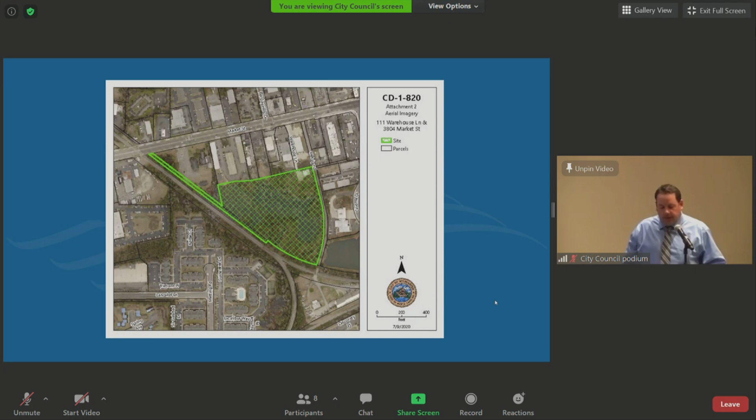Thank you, good evening Council. This item was continued from last week to allow time for the applicant and the adjacent owners to come to terms on the improvements being proposed. Just a quick recap: this site is located on the west side of Wetsig Road, south of Market Street, east of Cinema Drive. It's approximately 10.5 acres in size. The applicant proposes to rezone the property from CS Commercial Services to MFMH for a 192 unit residential development.

This proposal includes the improvement and dedication of Wetsig Road from the property boundary to Market Street, and the applicant is also proposing a right-of-way connection to Cinema Drive. This is the site plan that you saw last week.

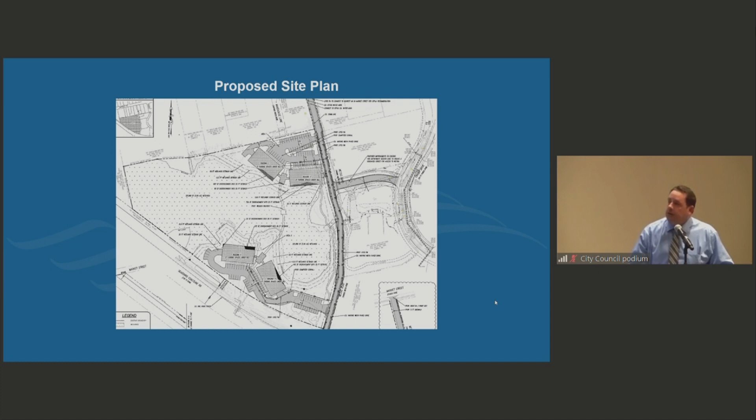Since that time, the applicant has modified their preliminary plan and moved that right-of-way down 30 feet away from the adjacent property owner. I have been in touch with the chair of the SRB, and they would consider that a minor modification, so it would not need to go back to the subdivision review board for this change.

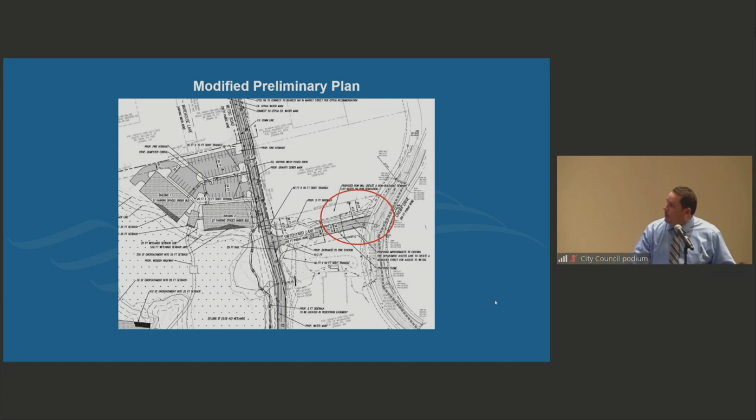I also want to go over, last time we had representatives here from the Cinema Drive Office Park. This is their approved plan, and their concern is future building and whether they'd be able to build it as proposed. We've spoken with staff in zoning and the city attorney's office, and we believe this site plan is vested, so they would be able to build this regardless of whether Wetsig becomes a public dedicated right-of-way or not.

There's also a provision of our code that says a public right-of-way conveyance impacts setbacks. So long as they meet 75% of that requirement, they would not be considered non-conforming. So based on the movement of the right-of-way and those provisions of the code, there's minimal impact on this property and its future development.

Staff really don't have any other further comments at this time or any updates. We do recommend a conditional approval. The applicant is here with a presentation as well, and I'd be happy to answer any questions you might have.

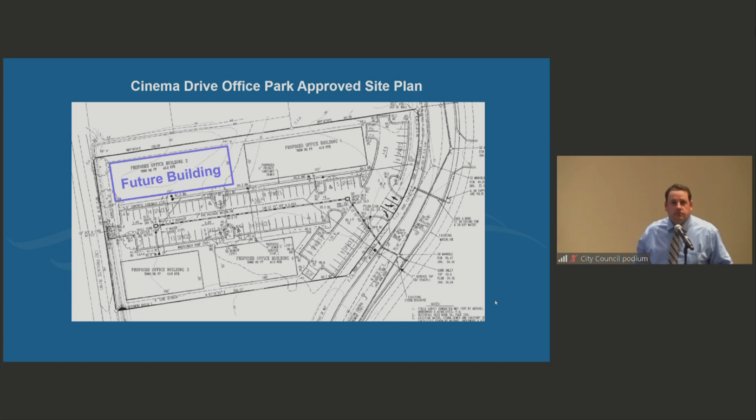Right now there's nothing specific in the ordinance for a condition on parking. Right now they would be held to the minimum requirements, although the land development code for parking does allow them to apply for an alternative parking plan that's reviewed and approved by the technical review committee. So that would have to be submitted to the review committee to get a reduced parking amount, but there's nothing specific in the ordinance that addresses that right now.

I thought the problem was the neighbors were concerned that they didn't have enough parking and that people would be parking on the roads. Correct. So that's still an open issue. The applicant has not changed the proposed number of parking spaces at this time.

Council member, I will note that if you look at condition 5 in the proposed ordinance, that has been updated and it would actually allow up to 80 additional parking spaces. That's not on the plan in front of you, but it is some flexibility that we have built in if council is so minded, so that the 80 parking spaces could be allowed.

And we even put in an ability for them, if you'll excuse the term, to wiggle the buildings just a little bit in order to accommodate that. If they were so minded, it wouldn't have to come back to council. What did you say about the building? Justin, go ahead, John, explain again please.

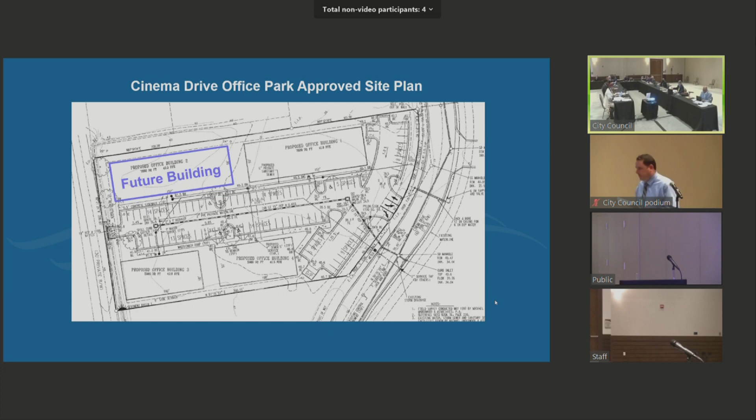Good evening. My name is Dave Spitrino, and I'll just give a quick recap. Since our last meeting, what I understood to be were the three main issues regarding our proposal. One was the alignment of the connector road that we're proposing.

If you can go to slide 2 on the screen. This is what we initially had, and I'll take the blame for this. I just was not picking up on the neighbor. It was the rear of their building, and I had the right of way going to the rear of their building. I didn't see a concern with that.

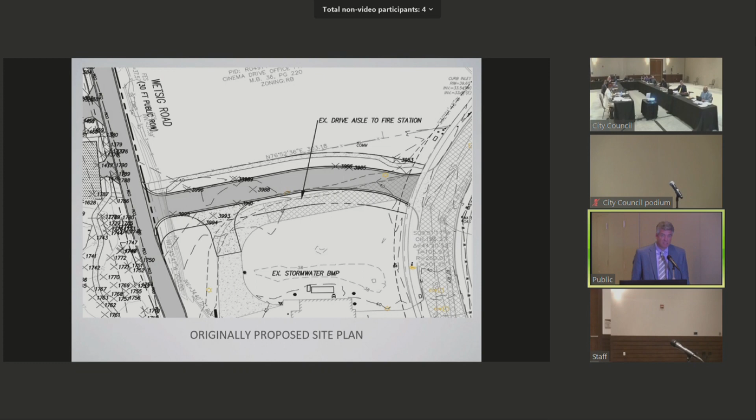When it was brought to my attention, we went to slide 2, next slide please. We've pulled that road over the top of the existing road where it is now, and that leaves us about 48 feet between the property line and the road. It seemed to be that that was the main concern, and as was reiterated to me, the concern of noise, but also proximity to their structures and also setbacks. So as being the main issue, we believe we've resolved that issue.

And again, I apologize. I didn't really ask the question as to why the road was in that place initially. I thought it was a technical reason, and I like it better here as well. So this worked out, I think, as a win for everybody.

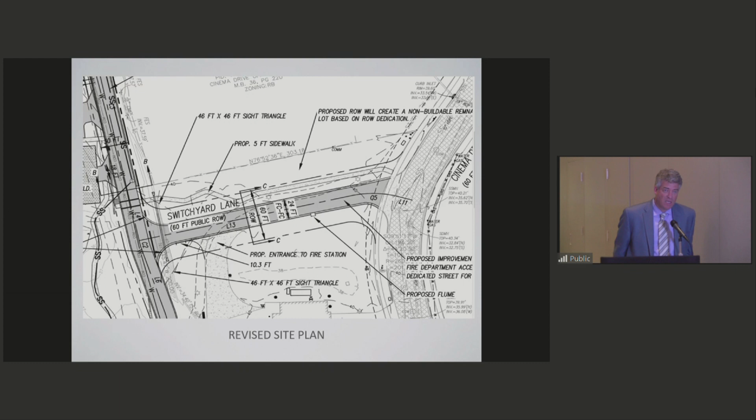The second, and Councilman O'Grady brought it up, we do not want to underpark our project. That is not our intent, but I'm more afraid of overparking than underparking. I can always pretty easily add more parking spaces. As mentioned, we have acres and acres of land that will not be developed. But if I need additional parking, I would much rather capture that additional parking when appropriate versus tearing out trees only to have parking spaces with no car there.

We are completely fine having a range of parking. Again, I'm going to be aggressive in trying not to overpark the site, but at the same time, we will create places and locations so that in the event we need additional parking, or if staff thinks we need additional parking -- our interest is in trying to preserve what's existing. There is no interest in clear cutting a site like this just to satisfy an arbitrary parking rule that doesn't necessarily apply to the type of users or residents in our homes.

And then last, and I was glad to see this was resolved, was the potential for a non-conforming setback along Wetsig Road once it becomes public. I didn't see this either, it just didn't dawn on me. Wetsig has been there physically for many, many years, decades at this point.

And to think that we were even approaching the potential of a taking of our neighbor's property, it's not something I would be comfortable with, and I certainly wouldn't ask my neighbor to be comfortable with that. So I appreciate the work of both staff and our city attorney in reassuring all parties that they're not getting a street frontage at somebody else's expense on a city street for potential future redevelopment at my cost, not theirs. But in the event that they want to do something differently or build to their existing setbacks, they're protected to do so. This is something we worked on diligently after our last council meeting, up through the weekend, and I'm glad to answer any questions.

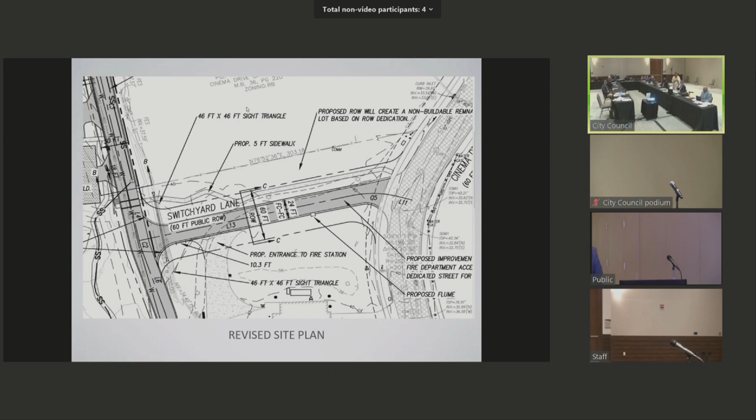Since we left the public hearing open, I guess this time I'd like to welcome anybody that wants to speak for or against this project to come forward.

Thank you, and good evening, Mr. Mayor and members of council. My name is Matt Nichols, and as you may recall, I represent the Cinema Drive Office Park Association. The relocation of Switchyard Lane, we appreciate that. That is a good thing. I think it's now shown as 47.5 feet from my client's property line to the proposed edge of pavement, and that is a good thing. We appreciate that. I do appreciate the city attorney's office and discussions on the vested rights issue, as Mr. Chambers mentioned. So I think we've clarified that issue.

My client's engineer, Dan Dawson, is here and had a few points he would like to make. I'm not an engineer, so if it's acceptable to council, I was going to have Mr. Dawson make those points related to some of the engineering considerations for the council's review. Thank you.

Good evening, council. I'm Dan Dawson, professional engineer. Just to make sure I got this straight, we were thinking Mr. Nichols would not be able to be here tonight. During the day, several of the HOA members who are engineers and surveyors went over and over what they want to make sure is covered. So that's what this plan presentation is about.

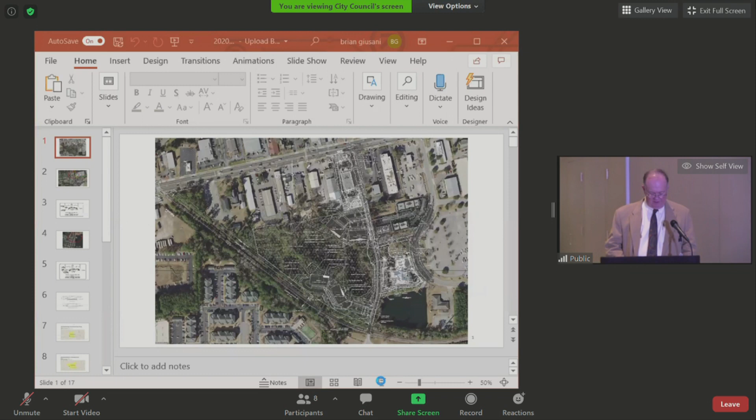Okay, we're now ready to go to slide 2. We have 3 main areas of concern that remain: infrastructure deficiencies, traffic problems, and land use changes.

All public streets should be constructed in accordance with city standards, with 60-foot right-of-ways and 25 feet from face of curb to face of curb. A standard public street should be constructed from Cinema Drive to the CSX Railroad right-of-way.

The HOA is concerned that converting Wetsig driveway to a public street, as proposed by the applicant, will burden the taxpayers with having to maintain a less-than-standard street, and later the cost to rebuild and widen it.

Based on information submitted, the applicant is proposing to widen the existing 18-foot driveway 1 foot on each side and add a ribbon of concrete or border, a 1-foot border along the edges.

The HOA is concerned that the street may end up being broomed off, with some asphalt and concrete added along the edges, becoming a burden to city taxpayers because the city council granted the waiver. Instead of the waiver, the HOA would prefer the city council encourage city staff and TRC to work with the applicant to provide an adequate and cost-effective street cross-section and pavement structure.

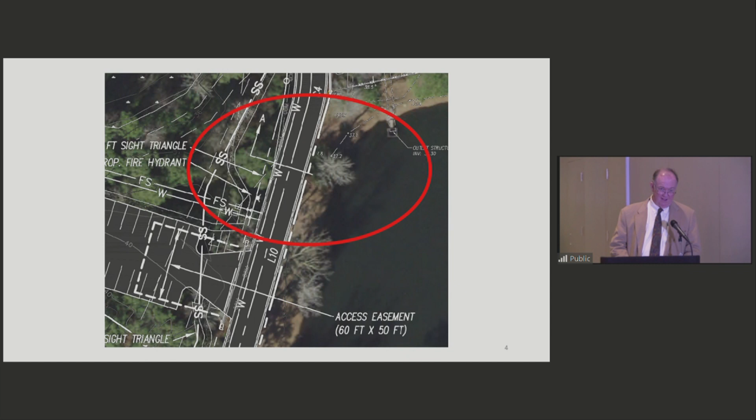Next slide. Oh, we're getting there. Next slide. Other way. The other next slide. What's going on?

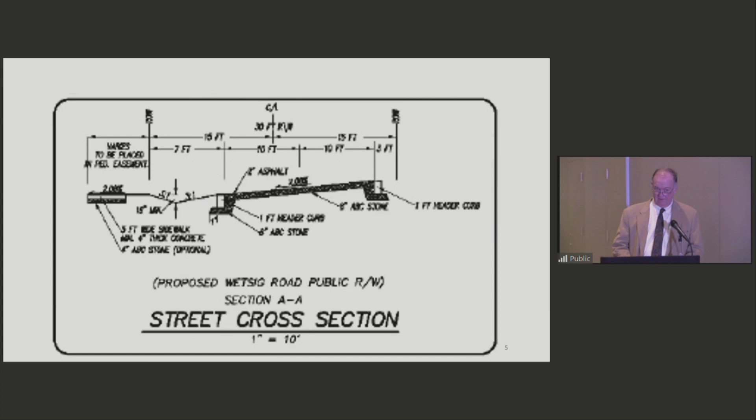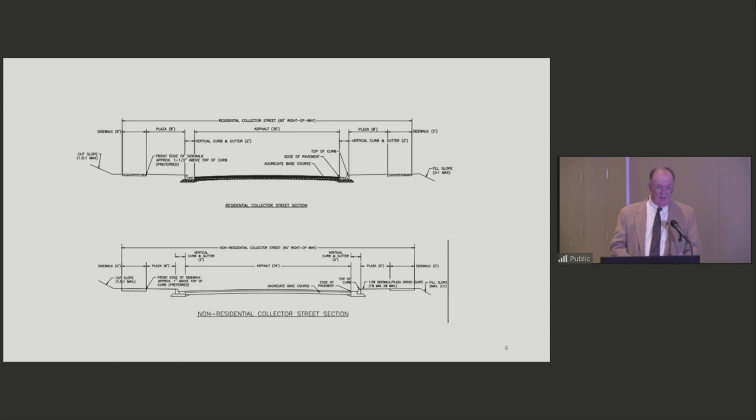We're worried about an inadequate stormwater network.

It's unfortunate for the applicant in that we call these infill projects, but quite frankly they're remainder projects—land remaining because nobody can figure out how to develop them. I respect him and his capabilities and wish him well as he pursues it, but he's got some challenges. Stormwater is one of them.

A member of the HOA observed stormwater flooding across the top of Wetsig Drive in the past. The existing culvert under Wetsig Drive lacks the hydraulic capacity needed to convey the upstream runoff, and the outfall for stormwater draining from the applicant's property is restricted—not only underneath Wetsig, but also when it attempts to leave the site across the railroad, it is restricted there also.

Fortunately for the city, the fire station was constructed 3 feet above the Wetsig road elevation. And I think that was for a reason.

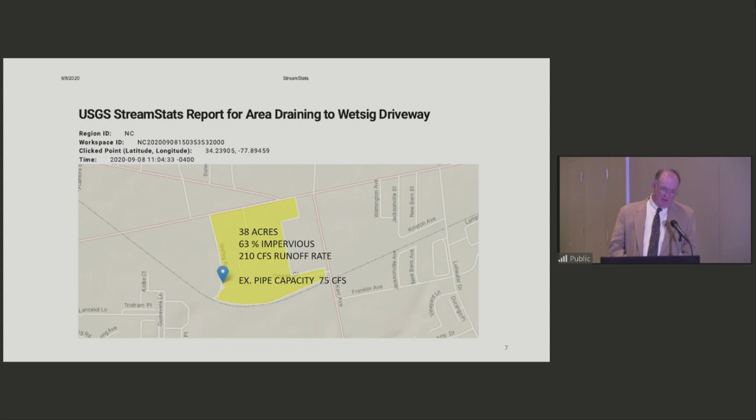Next slide. What basically you're seeing are the watersheds. The first one was the watershed to Wetsig Drive. The next one is the watershed down to the railroad track. There are large parcels of land.

The recent DOT widening of Market and Kerr Avenue altered that a little bit. We've met with DOT, or talked with DOT, about that. They've shared their limits, so it's a big watershed. I think if you look there, you'll also see that the current pipe underneath Wetsig and the current pipes underneath CSX are woefully inadequate to carry this water downstream.

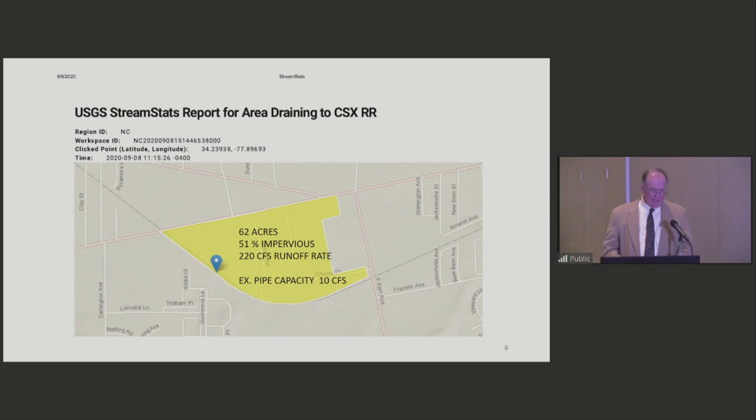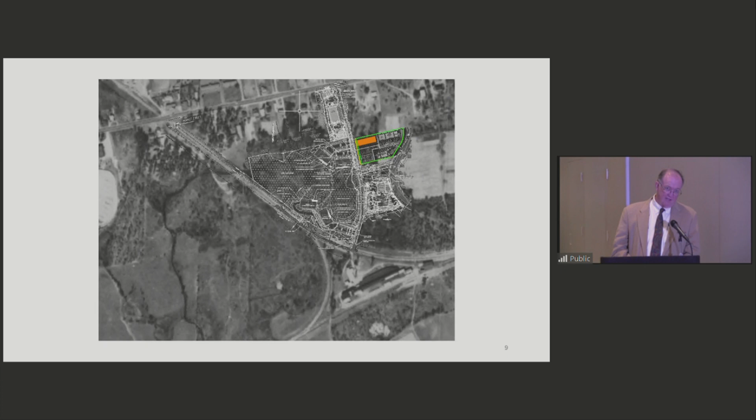Next slide. It's not there anymore. I'm not sure how the water will get out of this. It's very important, because when you take all that runoff from the upstream area and apply it to this site, the only place it's got to go is up, because there's virtually no outflow. I think that's why the road has been overtopped before.

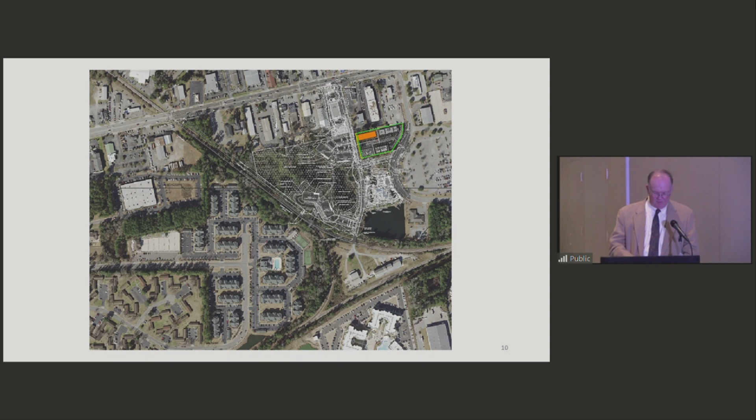So again, back to—we have concerns. We want it to work, but at the same time we really want the council and the staff to look at these things carefully so we don't have long-term problems. Next slide.

Okay, traffic problems. I told you there were three: infrastructure deficiencies, traffic problems, and land use changes.

On traffic problems: continuing to connect Wetzig to Market will create, and creates, a traffic cut-through that we do not desire to have. As proposed, a traffic cut-through will be created from Market Street to Carr Avenue via Wetzig and the new connector road, which will allow drivers to avoid 3 stoplights.

The Wetzig driveway from Mintz Plumbing to the right-of-way of Market should be closed and used by O'Reilly's, Mintz Plumbing, and Kyoto, formerly the Wendy's restaurant.

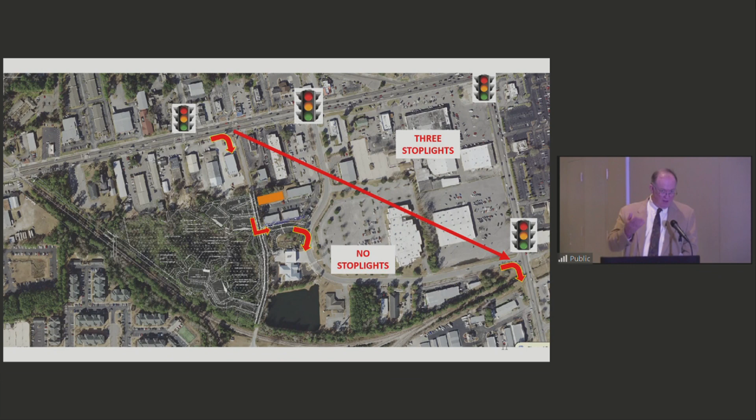We heard that once we started having questions, instead of dealing with issues, we were presented more challenges. A new challenge received on Friday was that the fire chief wants this connector road to Market Street to remain open. Even though it's 20 feet wide, I wouldn't put a $300,000 firefighting apparatus on it and risk it being damaged, but they wanted to keep that open.

This illustration shows there are 4 properties that would benefit from this drive remaining open. The alternative for fire response is to go to the new center via Market Street traffic, as they likely do half the time, and the other half they go down Carr Avenue, make a left, go down a half block to Barclay, make a U-turn, and they're in front of the 4 parcels.

So whereas we totally respect the fire department and know their response time is great, we disagree at this point about the true need to keep this 20-foot wide driveway open for the fire department.

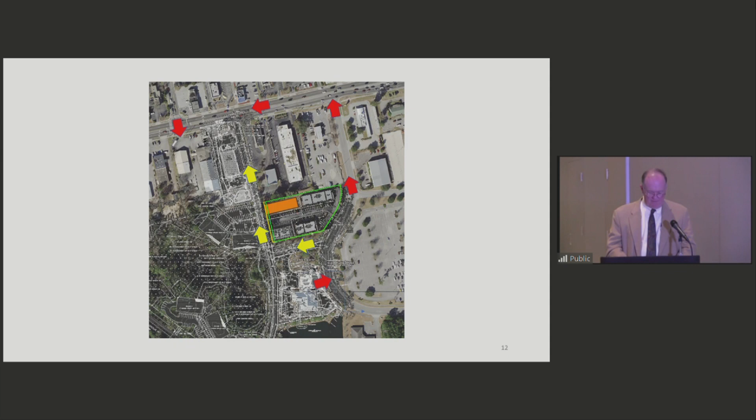Next slide. The immediate and future access to Fertile Ground - Fertile Ground, which is not the applicant, owns the 30-foot driveway strip from Market to the 3 acres of industrial property bounded by CSX tracks.

The property bounded by the tracks has probably been identified as a future hub for the proposed light rail system. As a hub, uses that could be foreseen in the future are park and ride, park and get on the transit, offices, more apartments, restaurants, etc. - definitely uses that are going to need more than a 20-foot wide driveway called a city street.

All of these future uses of this property will require more than a 22-foot wide and 30-foot wide right-of-way street. The existing traffic to the industrial property needs a standard city street.

To avoid the city having to purchase or condemn sufficient land for the remaining needed right-of-way, and then construct a proper road in the future, the HOA feels a standard public street should be constructed from Cinema Drive to the CSX Railroad right-of-way, as shown here.

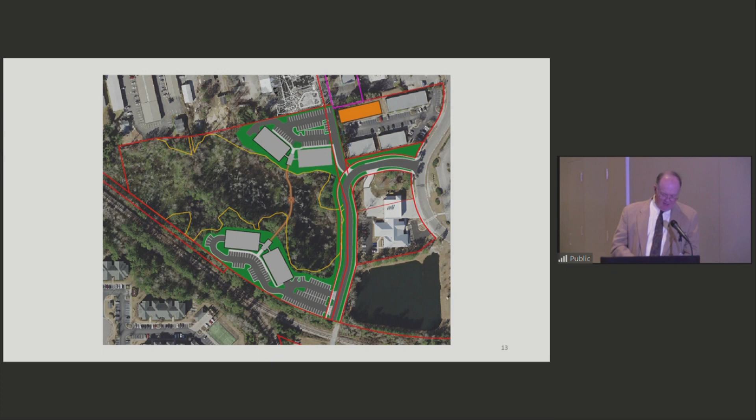Next slide. I'm about to finish. Land use changes - changes in the HOA rear setback requirements.

One of the owners asked me to add one more thing, and I apologize, I didn't have it in the notes. Back on the street right-of-way improvements and so forth, we realize the city decided this project did not need a traffic impact analysis. We don't know why, and we've been told certain things, but had it had the benefit of a traffic impact analysis, based on the experience of the parties, there would have been at least some determination as to whether additional length should be added to the left turn lane where Cinema Drive intersects Market Street.

In other words, when you bring all this additional traffic, and some of them are going to turn left, if you don't make that left turn lane long enough, you're going to have people backing into the through lane or the right turn lane. So we think, even though you didn't do a traffic impact analysis, that is something to be considered.

So on the changes to the setback, I think we've pretty much talked about that, but this setback issue is not just a zoning issue - it's also a distance from building to building. The current setback is 15 feet. The ordinance requires a front yard of 25 feet on the neighbor's property. The existing building is constructed 15 feet from the rear property line.

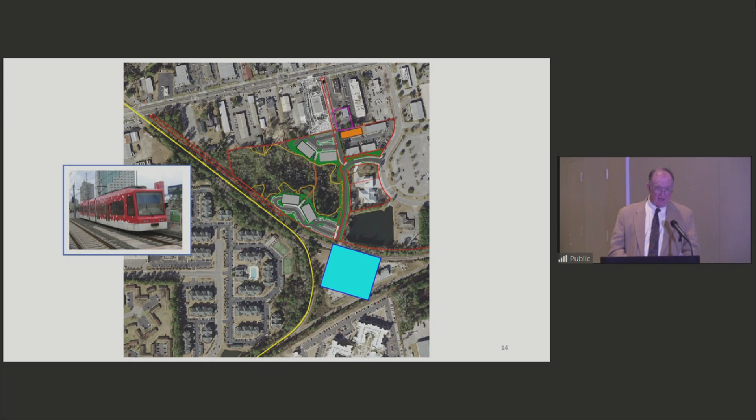The attorney's already covered most of that, and I'm glad he was able to cover that. So I'm going to move on to the last slide now, slide number 15. We're going to examine this area between the rear of the existing building, within that red oval.

You see the two setback lines. The yellow is the current setback line, the green is the proposed setback line if that's a dedicated street right-of-way. The point here is the distance between - you'll see on the left side there's building number 2, a 55-foot high building proposed to have parking on the bottom and 4 stories above it. They'll have to start about 3 feet above the road elevation just to keep from getting wet. But nevertheless, that building horizontally in plan view is where it's located. My client's office, or one of his buildings, is across the street.

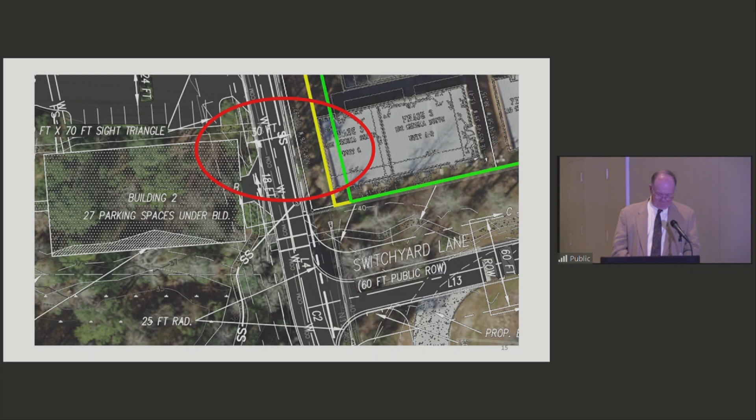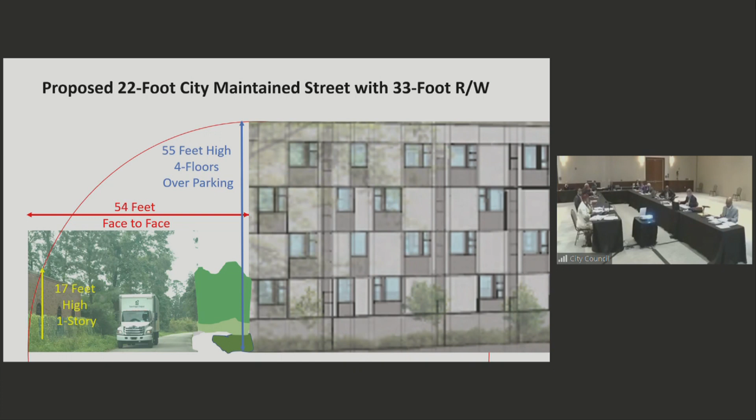Yes, sir, Mr. Anderson has a question here. Mr. Dawson, I'm curious - when that was zoned there, the office park, do you have enough parking to do the fourth building? Is that an abundance of good parking?

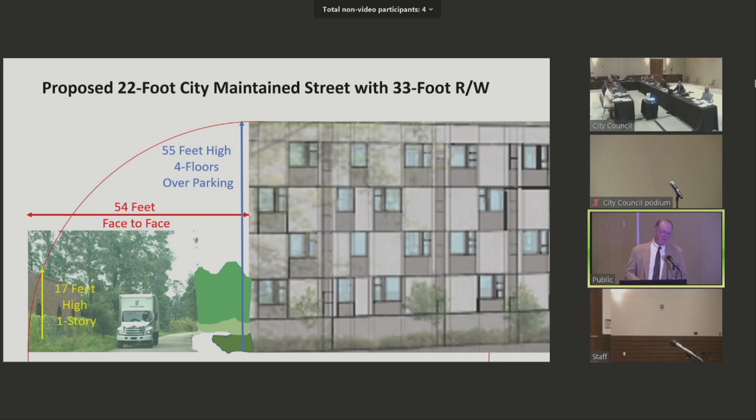Yes, sir. In fact, I believe the applicant, or maybe the staff, had a good photograph of the site - that's a good point. Another good point is the applicant's connector road is one lane in, one lane out. The HOA's property has 3 lanes: an entrance lane, a left turn lane, and a right turn lane. We strongly encourage that on that connector road, given the potential for future traffic, that the city consider requiring a left and right turn lane so traffic doesn't get backed up when Cinema Drive is busy and someone's trying to make a left turn.

Okay, yes sir, Mr. Spears. My question is for staff about these 9 waivers - I'm interested in that. The 9 waivers that Mr. Dawson told us about.

Yes, sir, Mr. Spears. The waivers for this from the city's technical standards were applied for and granted by the subdivision review board. Anytime you have an improvement in a public right-of-way or a proposed public right-of-way, it's required to be reviewed and approved by our subdivision review board. So it's my understanding, and the city attorney can correct me, it's outside the purview of the council to grant those waivers. The code is set up so the subdivision review board reviews and approves those waivers as the applicant requests them and as those public improvements are reviewed.

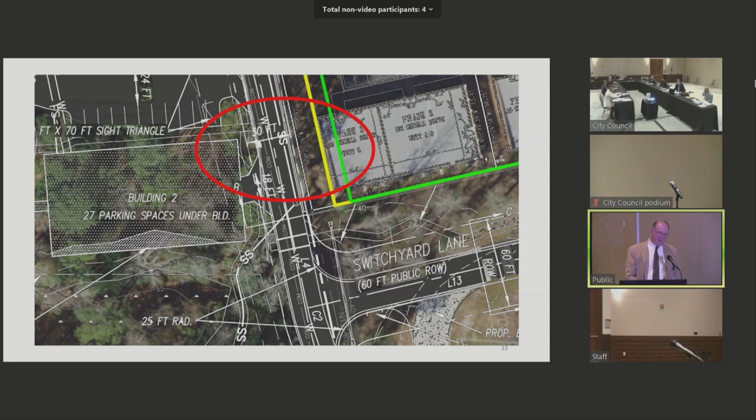One more. There we go. Instead of the curve up there with the driveway going into the top two buildings, if you make a T intersection, you just have that branch going to those two buildings as a private street, part of the site development plan. And then continue the public road from that T intersection over to the railroad track.

Notice the parking configuration we were showing down on the lower buildings 3 and 4. You can drive in one driveway, loop around and come back out. It gives you more parking spaces and it gets you turned around.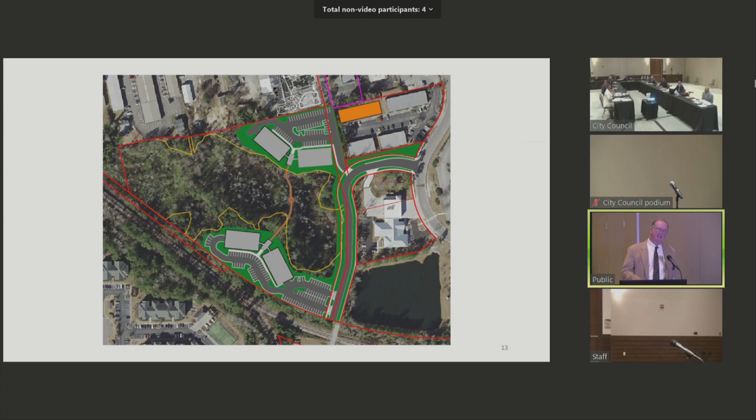If you go to the very last slide, I think it is, it shows the actual development. There we go, right there. It's hard to see, but basically there's one driveway into the project at the end of the 30-foot right-of-way, 20-foot wide street. And we see that as going to be a challenge to manage as a municipal service in the future.

And we suggest right now - in the Planning Commission meeting, the applicant said he's got 80 feet but is trying to protect trees or something like that. But he said he had 80 feet to work with. And all I'm saying is, if you don't get that right away now and you try to use that property across the railroad track, the taxpayers are gonna pay dearly for it if you have to take out some of the precious parking places and widen that road, and then you have to rebuild that road and move it to the center of the right of way.

We just think now is a good time to work with the developer and work out those details. That's all. And I apologize for not saying this, but thank you very much for hearing me out tonight. My clients are gonna appreciate it. And we wish this project well, but we do hope that you've heard our concerns. Thank you.

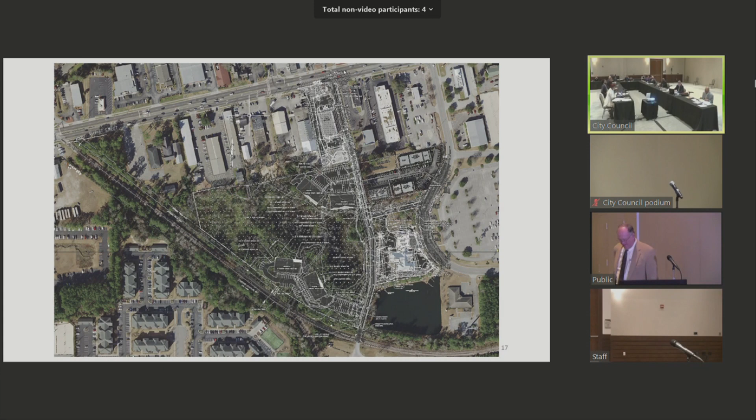If anybody's going to speak, you need to speak now. You've left the building. Sorry to hear that.

Dave Spatrino, the applicant. A couple things. If the city is planning to put a transit center, which is fascinating, and I'm certainly supportive, please bring it in from Kerr Avenue, not from my site.

But I think I'm glad to answer any questions. I want to make sure that I at least help you recognize that this has not been rushed through. I am on month 13, and as of Friday afternoon at 5 p.m., I'm at $718,000 in costs. So I know that's not your problem. We don't want to rush anything through, but it's not like I'm just winging it out here. I am a professional. I take this very seriously, and I refuse to even be purported that I don't follow rules, or that I'm rushing things through, or that waivers aren't a normal course of infill development.

So I'm glad to answer any questions, but I assure you that there is no mechanism where city engineering has ever even winked and nodded and said, hey, don't worry about the fire department, or don't worry about stormwater. There is never a world that I've ever even known where the engineers are looking to - and I'm not maligning them, but I've never made my life easier with a room full of engineers.

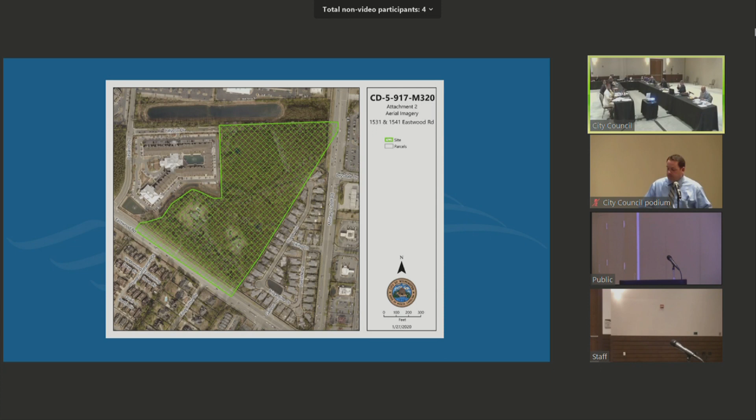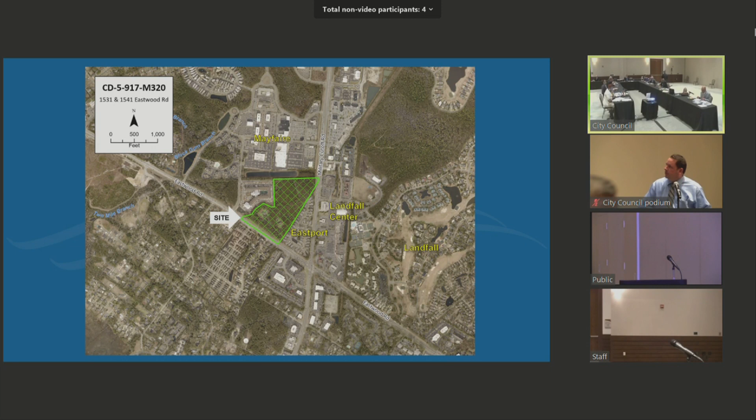This site is located near the intersection of Eastwood Road and Military Cutoff Road. It's approximately 23 acres in size. I believe it still contains those two single-family homes and a vacant tract. This is a map showing the project in the context of the surrounding neighborhood. You can see Mayfair to the north, Landfall Center across Eastwood, and then Eastport directly to the southeast. We have a few photos of the site looking up and down Eastwood and then looking up and down Military Cutoff Road.

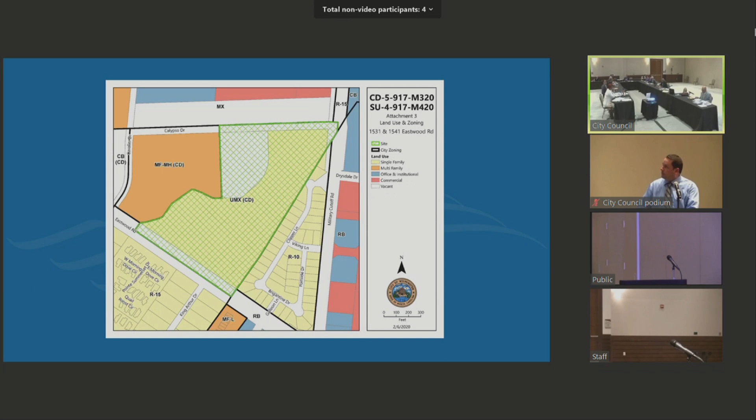On July 17th of 2018, council rezoned this property from R15 to UMX CD Urban Mixed Use Conditional District for the construction of a large-scale mixed-use development, which is Centerpoint. This is the currently approved site plan. City Council also approved a special use permit for increased height of 75 feet for two structures. One would be the 75-foot tall hotel.

I thought there was—is there not like there, this right here? Hey, that's cool. All right, sorry. There's a 75-foot tall hotel right here. And then the apartment building that wraps this deck was at 68 feet.

So the applicant is requesting to modify the site plan to this, which would relocate the hotel to Eastwood Road, but that hotel will now be at the by-right height of 55 feet and no longer 75 feet tall. And then the existing special use permit for the apartment building will remain in place, and this apartment building would stay at the 68 feet that was approved the last time you guys saw it.

This slide summarizes the proposed land use changes. In your packet, the applicant was originally requesting an increase in hotel apartment units and an increase in keys to the hotel number of rooms. I just found out earlier today that they wanted to reduce that back to what was originally approved. So it goes back to what's in your ordinance today for the number of units, which is 300 apartment units and 200 hotel rooms. The other uses they were requesting are actually a reduction in the overall square footage of office, retail, and restaurant space, so there's no need to update their TIA because they're actually under it and reducing the number of trips generated at this site.

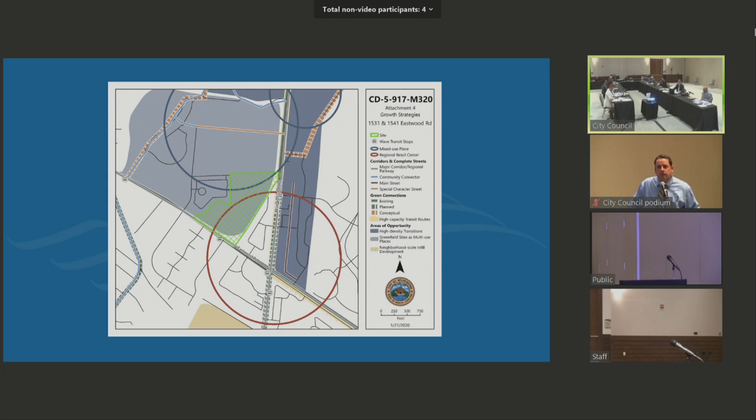Okay, any questions for staff? Mr. Barnett? So help me understand—they were originally, last week, talking about making two buildings 75 feet, right? Moving it up to 75 feet.

Going back to the original proposal from almost a year ago, this council approved two structures to be up to 68 feet for the apartment building and 75 feet for the hotel. Now they want to move the hotel, but drop that down to 55 feet.

So if it's by right, you don't need a special use permit for a by-right height. That's why they're withdrawing the SUP modification.

So all the other stuff I read last week that kept me up - that information came in after the packets were put together and sent out, so we apologize for any confusion that caused. But I've received many calls throughout the years on this project, and everyone I've talked to has hung up with a happy tone. The neighbors are pleased with what's being proposed at this point.

The neighbors are pleased because they're reducing the height. I've got maybe 8 to 10 people who call me constantly to ask about this project, and I give them updates on the status and when construction starts. I think I'm in their calendars to call every month for an update. They all called once the signs went up asking what's being done now, and when I explained, they said the developer actually listened - they're really pleased with this. That was the gist of most of the conversations.

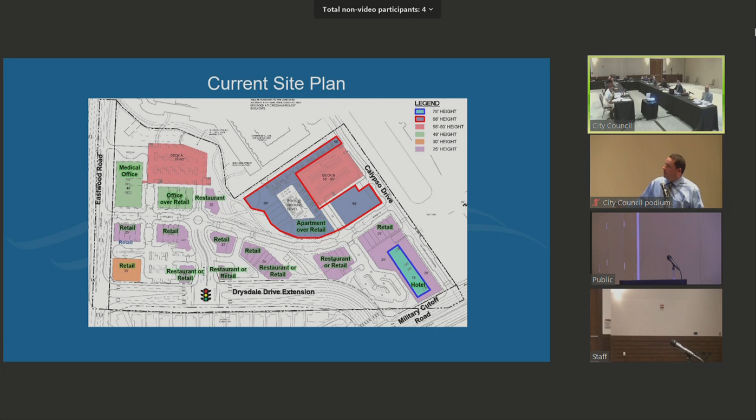Then the hotel - in the old plan it was at 75 feet, in the new plan it's 55. The old plan has the apartments wrapping the parking deck with the deck at 55 feet and the blue section at 68. The new plan has the parking deck still at 55 feet with wrapped apartments and retail below at 68 feet - we were just approaching it differently. I'm more than happy to send this out. I apologize for not getting it to you before the meeting.

I'm glad they withdrew the extra request. It seems like this second plan just has, I thought, what we were trying to avoid, which is a sea of parking at ground level.

So my concern is, if they're reducing the retail, why do we now have all of this parking on the ground when they could have probably one more level at least on the parking deck and stay at the 68 feet or whatever, like the apartments around it, instead of having the deck be whatever the difference is between 55 and 68 - I guess that's 13 feet. I don't get it, I don't understand it. When you're reducing your retail and now you have all this parking, it's going to look like the Kmart parking lot.

Well, I would have to defer to the applicant as to their parking needs on this, but I will say that staff did work with them to try to line the entrances with the building, so you're at least to make an attempt to put the parking behind the building. It didn't happen in every instance - obviously you can see here you've got an entrance with the parking on the other side. I can't speak to what their market needs are for the surface parking - they would probably have a better answer than I would, but we did try to work with it the best we could to hide it as best we could.

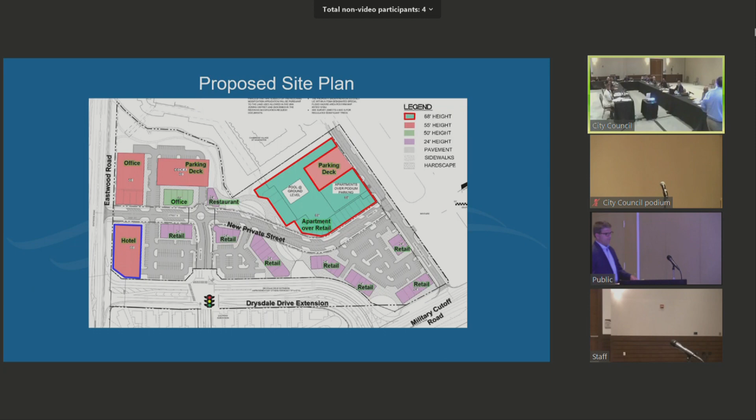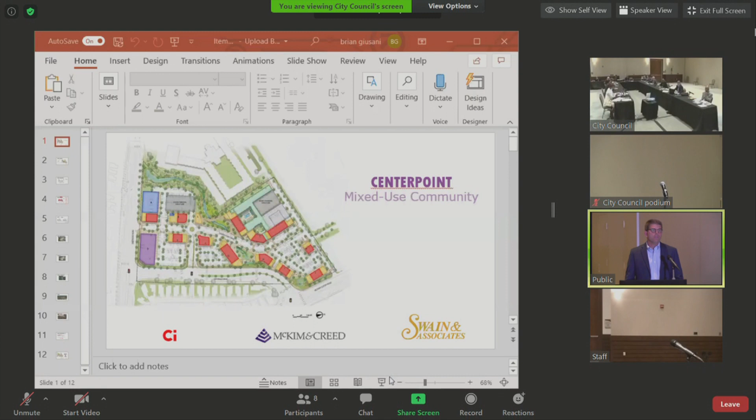Good evening, my name is Jason Swain, I'm with a company called Swain and Associates. We're a small family-owned development firm here in Wilmington, and we're back before you again this evening with a few modifications to our development plan for a project that we have proposed at the intersection of Military Cutoff and Eastwood Road. As many of you know, we started this project about 4 years ago, and we came through last year in July and received unanimous approval at City Council and at Planning Commission as well for our project.

The reason that we're back here tonight is really because of a change that was necessitated by our working with the Department of Transportation. And I'll address something that you all were talking about a moment ago. It's not often the developer comes in and asks to downscale his project, and I know that may seem a little odd, but I'll explain why that is in a moment as well.

At the intersection of Drysdale Drive and Military Cutoff Road, we had proposed a 75-foot hotel. When we originally developed our plan and came through for approval, NCDOT had given us their roadway plans for the Drysdale Drive extension. However, after we received approval and DOT finished its roadway design, they decided they needed additional right-of-way at the intersection of Military Cutoff and Drysdale Drive extension, and essentially at that corner they took a significant portion of our parking lot.

That made it infeasible for us to develop a hotel there, because there wasn't adequate parking for loading and unloading at the hotel door. So after looking at our plan and moving things around a lot, we decided the best way to accommodate a hospitality component would be to move the hotel from the intersection of Military Cutoff and Drysdale Extension to Eastwood and Drysdale Extension. That's the purple building you see there right now.

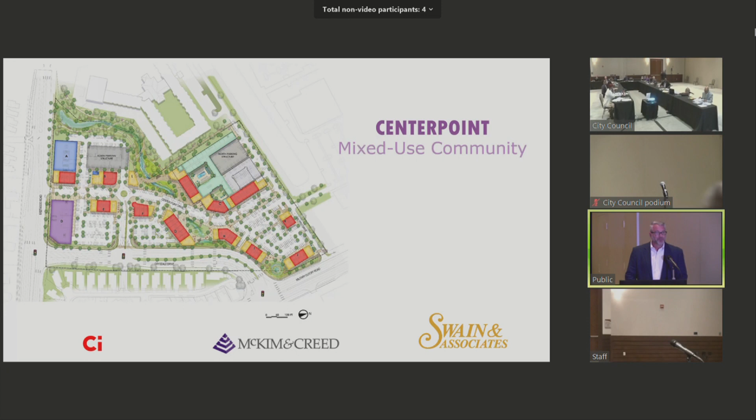Good evening, Mayor and Council. Richard Collier, 243 Front Street in Wilmington, North Carolina. Next slide for me, Greg.

As has been discussed, CenterPoint is a mixed use project that will have some live, some work, and some play all in the same place. The benefits of mixed use we all know—it gives folks places to go where they live, places to work where they live, and everything is near the services, which are easy to get to. On the CenterPoint property, we're talking about apartments, hotels, medical office, general office, retail, and restaurant types, whether fine or casual dining opportunities.

This is the same as it was in 2018. Next slide.

This is the CD zoning modification plan, which sets it up for UMX zoning, with the right-of-ways being general UMX. It shows that we've decreased our overall restaurant and retail numbers, predominantly because there was a bigger box under the multifamily section reserved for a grocer. When that grocer—or the one they were working with—pulled out, they needed to pull that square footage out, so that's where the largest reduction in retail square footage occurred. We also have a 4,300 square foot decrease in our office use, and we're shifting the location of the hotel to the corner of Drysdale and Eastwood, as discussed earlier.

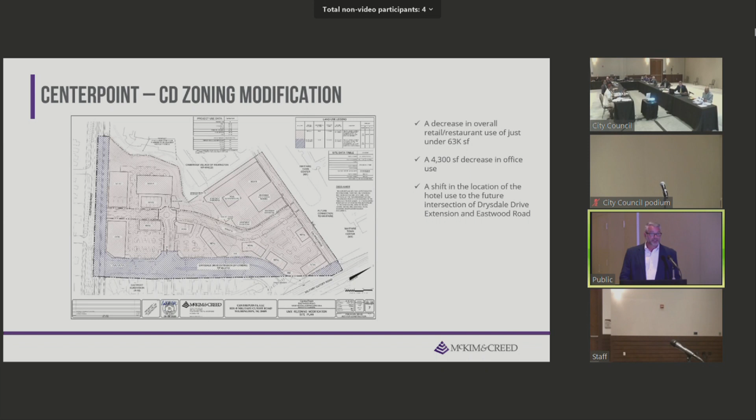So we are withdrawing our SUP. This is the color drawing I think you guys were referring to earlier, and I'm going to walk through each one at a time so you can see the heights in this proposal tonight, which is different than your package, but should shed some light and answer the questions.

So the first slide shows a building coming in, now the hotel slide. For the hotel, we're requesting it stay at by-right 55 feet. The only change we've asked for this evening is its location, moving it from the intersection of Drysdale and Military Cutoff to Eastwood and Drysdale, as Jason spoke of a few minutes ago. It would remain 55 feet, reverting from the 75 feet approved previously.

So the blue building in the square is the apartment building, which also has retail on the ground floor along the plaza area and the street. That building, the multifamily, was approved in 2018 at 68 feet, and the parking deck was 68 feet during that original approval. We've determined it's in the best interest of the project and all the neighbors and other stakeholders to leave that at those 2018 approvals.

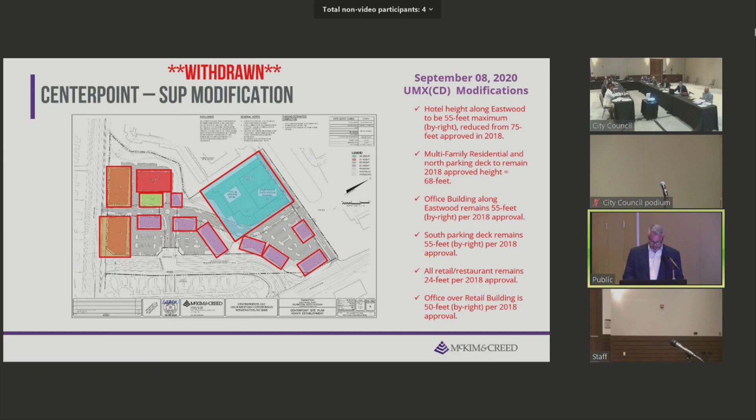This slide represents the 2018 plan and the 2020 plan. I gave Brian the updated portion of this plan earlier today to provide in his presentation and ours. It was changed this morning just to make sure the heights were being shown correctly to council this evening. We know we were going to withdraw it, but we wanted the heights represented correctly so that neighbors, stakeholders, and council understand what we are proposing. As you can see, it is not tremendously different.

The largest change is where the hotel moves from Drysdale and Military over to Eastwood Road. There is some more surface parking than was in the original project. Some of it has to do with convenience parking for the retail restaurateurs, and some with parking near the hotel to allow drop-off and pick-up, plus temporary parking for guests while they're loading and unloading.

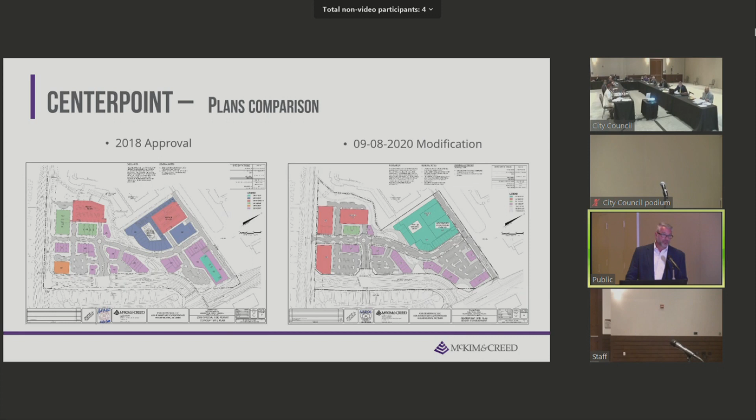The center street, the main street going through the project, has a roundabout by the southern deck, and that roundabout is still in place. However, the alignment of the street from the roundabout to Drysdale Drive has been adjusted. Jason mentioned earlier the DOT right-of-way issues — part of that is this realignment of the street and the right-of-way access secured to provide signal and access into the Eastport Village property. The signal poles themselves increased the right-of-way at the entrance, and that pushed everything out, which is the biggest reason for the changes on this southern end of the property.

These are the improvements that were proposed in the TIA. We are still planning on all of these being made. The blue are the improvements that the developer is responsible for, and all of the Drysdale Drive Street improvements, NCDOT is funding under their TIP project. We're still working with NCDOT to better understand the delays and timing of their projects.

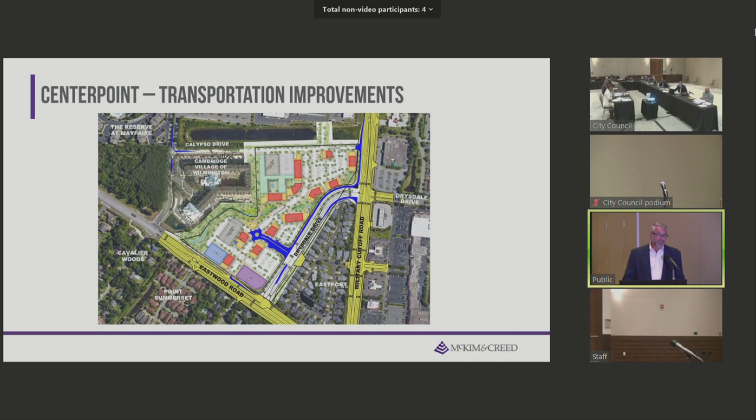Access to the site remains the same. We still have access from 3 different locations from the property: one onto Eastwood Road, one onto Drysdale Drive, and a public street connection on Military Cutoff from Calypso. We would be extending Calypso Drive from Cambridge Village so that road will connect through between Cavalier Drive and Military Cutoff, giving better circulation for everybody in the area. We also show a connection to the Mayfaire Community Center to the north, and that discussion and easement will be forthcoming as we get into the technical parts of the design.

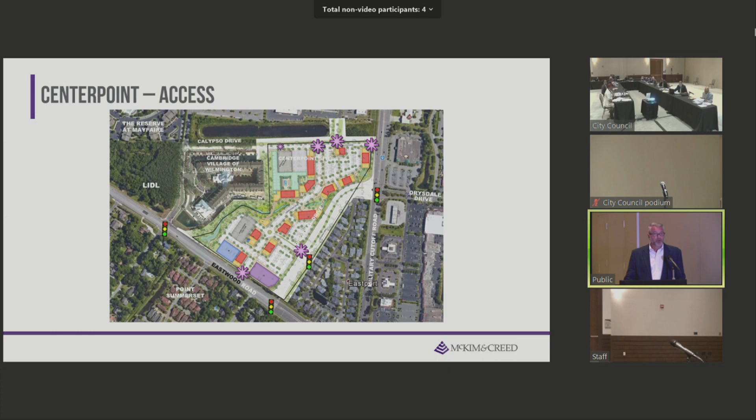Pedestrian activity or interconnectivity is always a big issue in our city. We've invested a tremendous amount of money in the Cross City Trail, so as DOT is extending up Drysdale Drive, a portion of the Cross City Trail will extend over to Military Cutoff, and then connect across the street with the trail that goes north on Military Cutoff. It will also provide access to the eastern side of Military Cutoff, where the bus stop is currently located, and at that signalized entrance there will be pedestrian lights to cross the street safely.

We're also providing paths through our plaza and connections to Cambridge Village along the creek on the southern portion of our project. That will provide a walking path for our neighbors, our residents, and people on the Cross City Trail. They can come down and walk through, and as David Swain has said a couple of times, sit down and have a glass of wine at one of the restaurants in the plaza. We want to make sure this is pedestrian friendly, as well as provide for all the accesses into and out of the property.

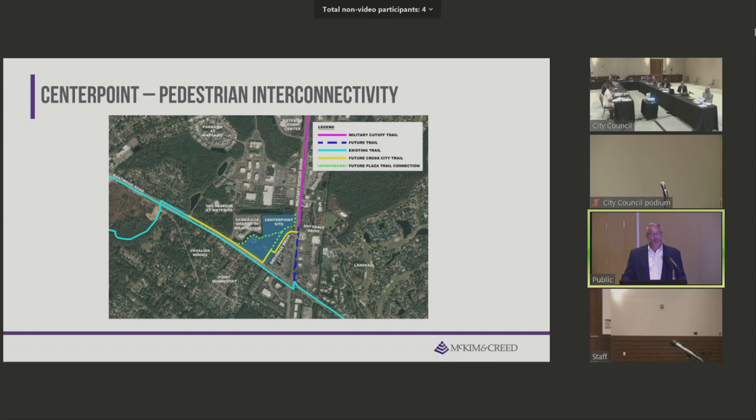Common spaces remain the same. Everything about our project, its feel and intent - interior, pedestrian friendly, a place folks want to come and gather and spend time with their friends - has remained exactly the same as it has from 2018.

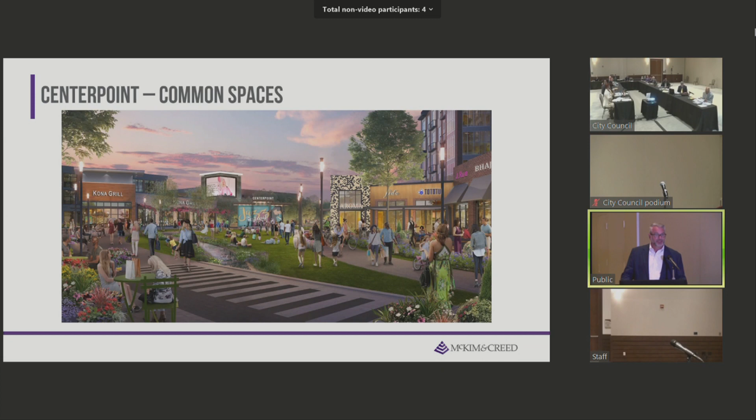So finally, our 2020 UMX CD modification - we are going to live, we're going to work, we're going to play, and all of that's incorporated into mixed use. For the 2020 modifications, we listened to the neighbors and stakeholders on the height, and that height has been reduced - we reduced building heights on Eastwood Road to 55 feet. The hotel location's been shifted to the Eastwood and Drysdale Drive intersection. Medical office and general office uses are still included, at the request of Cambridge - the wording of our last modification took out the word medical office, but it's not gone away; we wrote it as general office, but medical office and general office are still included uses. We maintained the 2018 approved number of multifamily units and hotel rooms, and finally, we have CenterPoint 2020.

We hope these modifications are received well by council and by the local stakeholders. We appreciate your time this evening, and we know it's short notice having the SUP removed off your agenda.

But we feel that, based on citizen comments, neighbors, and stakeholders, reducing those heights and keeping them at the by-right 55 feet with the parking decks is a much better project overall for everyone, and will be received by the community much better long term. We greatly appreciate it, and we ask that if you have questions, Jason and I are both here to answer them. I think we have a number of folks from the community that may also want to speak, but thank you.

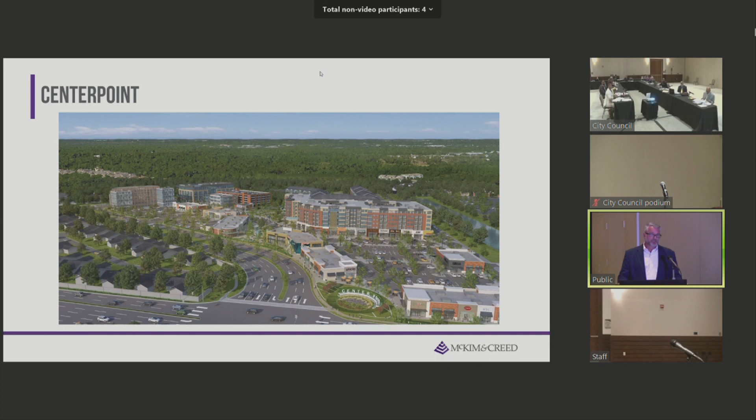Yes, ma'am. Greg, if you could go back to my second or third slide, that's the overall site plan. I think that's the quickest way to get there. My point, Ms. Haynes, is that the street itself, the main street of the project, still maintains all the elements of the comprehensive plan, with parking beside and behind.

Where the unfortunate part comes in is where Drysdale Drive is located. On the eastern end of the map, which is the northern end the way it's laying, all our buildings are between the street and the parking. On the western end by the hotel, we have parking lots on either side of the entry drive. We had buildings there back in 2018, smaller retail and restaurant buildings on the corners that helped block some of that. But you start looking at whether you should service the main street coming down with main street retail, which is a lot of what's contemplated in the comprehensive plan, and then protect those two parking areas from the adjacent arterial street in Drysdale Drive, and which is the better way to handle it and still provide the parking the retail components are looking for.

Now, the other thing that's not showing up as well, our original plans had on-street parking as parallel parking, and we've proposed 45-degree angled spaces, which is going to increase that surface parking along the main street through Center Point Drive. Those spaces are the same, just in a different orientation. So in terms of impervious surface generated, we've not increased it, we've probably decreased it through some of the modifications we've made over the last 6 or 8 months.

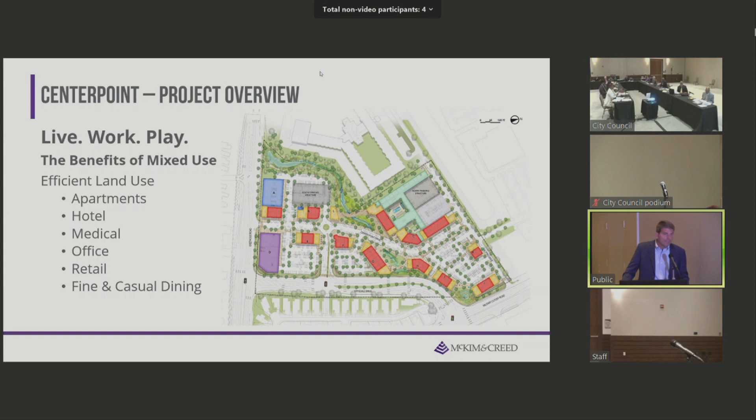Okay, Ms. Swain, thank you. Thank you very much. Like I said, we're real excited about the project, and we can't thank you all enough for your kind consideration. Okay, thank you.

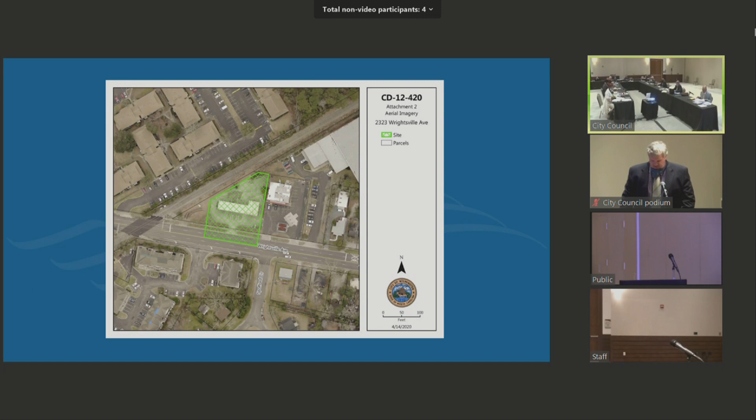The item before you tonight is to rezone the site from commercial services to community business to allow a 4,000 square foot commercial space and a maximum of 5 residential units. A special use permit is also proposed to allow a new structure over 3,000 square feet in the Wrightsville Avenue corridor, as well as to permit a laundromat use with no drop-off windows.

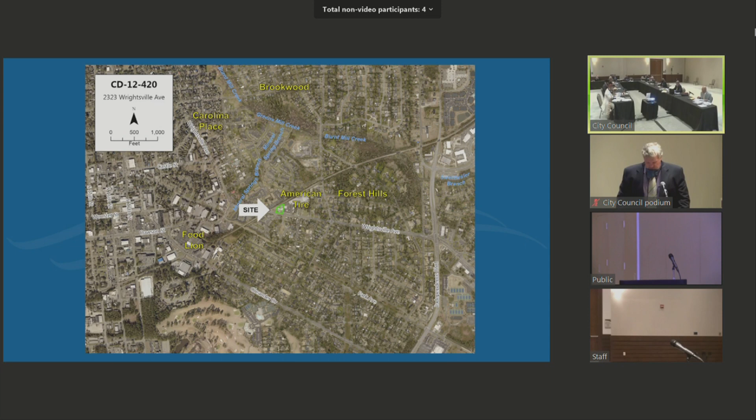The Land Development Code requires the issuance of a special use permit for new non-residential or multifamily structures exceeding 3,000 square feet in the Wrightsville Avenue corridor. In the CB Community Business District, a portion of the corridor, laundromats with no drop-off windows are only allowed by issuance of SUP. This is an overall site showing the location.

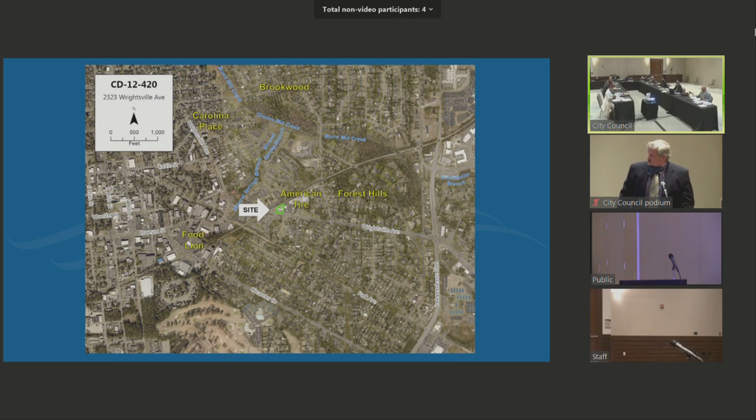The parcel is currently vacant, but was previously occupied by a self-service car wash facility. There's no known zoning history on site. These are the adjacent photos showing a convenience mart next door. It's adjacent to multifamily and across the street, and a commercial site in the rear of the site. I think it's a tire shop.

Of the proposed commercial space, 3,000 square feet would be a laundromat use, 1,000 square feet would be commercial, and 5 residential units are proposed as part of a conditional district mixed-use development.

The project proposes to continue utilizing existing driveway access on Wrightsville Avenue. Wrightsville Avenue is identified as a community connector for planned and conceptual green connections as identified on the comprehensive plan growth strategies map. The proposal consists of infill development consistent with the surrounding area with little impact to adjacent properties, and allowing services such as laundromats within walking distance of multifamily and single family developments is encouraged.

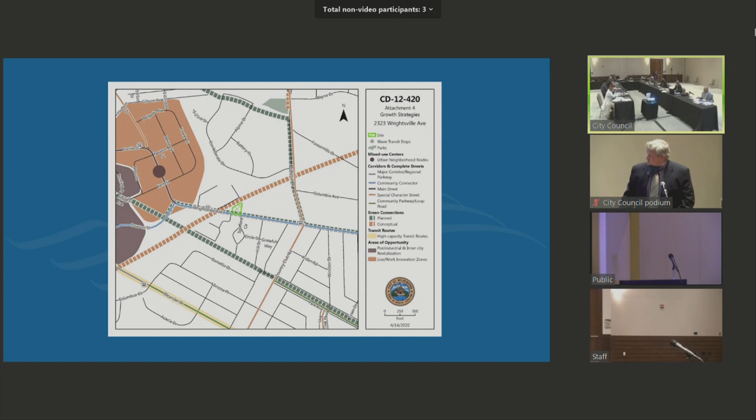The Wrightsville Avenue 2030 plan encourages a balanced mix of land uses that offer options for residents while ensuring new developments enhance the corridor and the surrounding neighborhoods. The plan recommends phasing out CS uses and encouraging neighborhood scale commercial uses that generate minimal amounts of traffic and complement the adjacent neighborhoods.

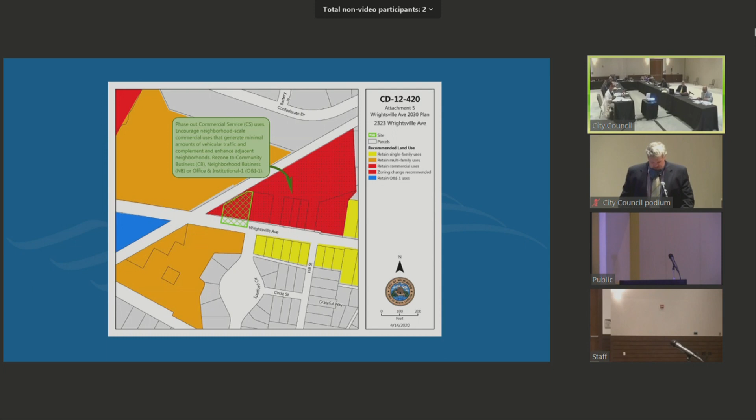By placing commercial services and multifamily residences within walking distance of the current CSX rail corridor, the project is consistent with the broad transportation objectives of the city's rail realignment and repurposing initiative. Staff believes the amendment is generally consistent with the policies of the Create Wilmington Comprehensive Plan, the Wrightsville Avenue 2030 Plan, and the city's adopted focus areas.

If the council votes to approve this item tonight, we have suggested conditions contained in the case summary. I'll be happy to answer any questions you may have. Any questions for staff?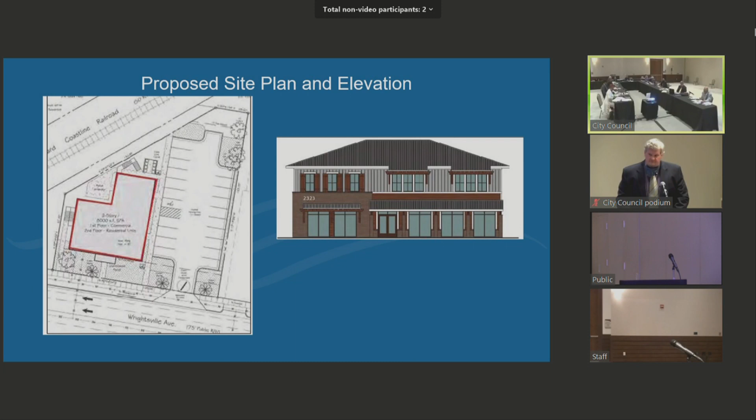Good evening. My name is Jeff Carney. I live at 6001 Mott's Village Road, and I'm the owner of the property. At this time, I'd like to bring up Ms. Wolf to discuss my petition.

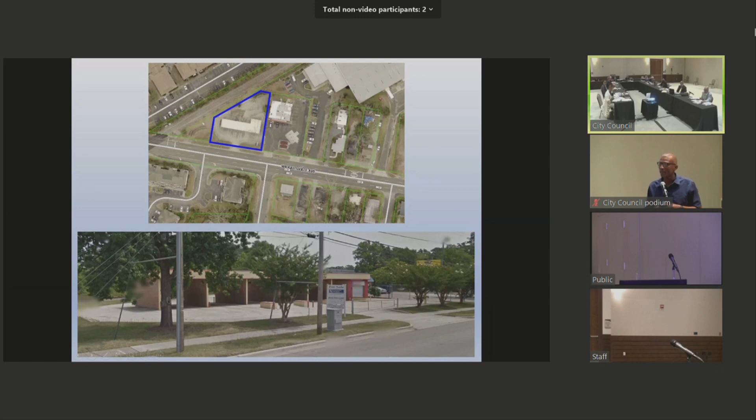Good evening, I'm Cindy Wolf, and I've been helping Mr. Carney through this process. This is one of those sort of dream type of projects that just checks all the boxes of what we're hoping for as far as redevelopment in our city.

Certainly this stretch of Wrightsville Avenue near the railroad crossing has been transitioning over the years. They have the nice trolley development right across the street, and what was the car wash had deteriorated and was certainly becoming an eyesore. So I applaud Mr. Carney for going ahead before anything and demolishing that - it's now a vacant parcel. Regardless, the commercial services district that overlays it now allows much more intense uses, and they're certainly not always appropriate for the historic character of the Wrightsville Avenue corridor.

Although the Create Wilmington Comprehensive Plan failed to include the subject site in that area of opportunity that's closest, it is still very near to other properties identified as post-industrial and inner-city revitalization, and also the live-work innovation zone.

So what we've proposed here, in the purest sense, is the commercial district mixed use that we sometimes argue is being taken advantage of. This is a 50-50 kind of split for the amount of commercial use on the ground floor and the live-work-play type of opportunities in the up to 5 units that would be overhead.

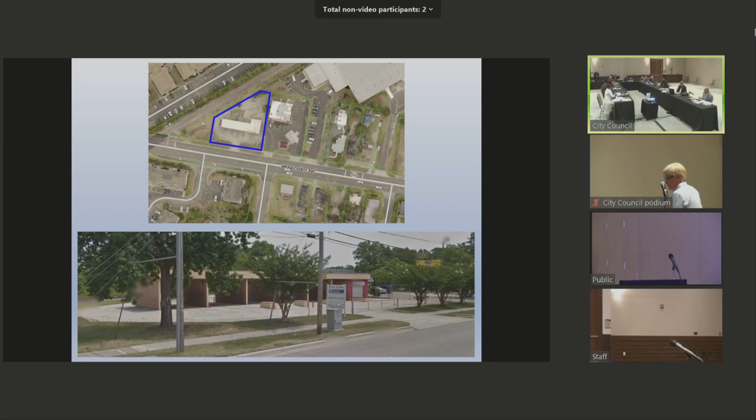Next slide, please. This is the plan. It's a small site, sandwiched in between the railroad right-of-way, Wrightsville Avenue, and an existing convenience store. We've taken a lot of time with his architect to come up with the concept that Jeff showed you, and we've kept the parking off to the side. So everything about the site, and some community areas behind it for the residents, really fits into the character of the Wrightsville Avenue corridor.

That pretty much, I think, justifies in our mind the rezoning section of it. But because this building is larger than 3,000 square feet, of course, we have the special use permit. And the findings for that are the public health, safety, and welfare - certainly taking down that deteriorated car wash was a big part of that. We would have public services for the sewer and water.

And then going through all of the Wilmington Code requirements for the plan, this plan does meet all of the required conditions and specifications of design. We certainly don't believe that it would substantially injure the value of adjoining abutting property. Redevelopment of the site will improve the aesthetics of the area immediately around it, and the enhancement will be a benefit to the surrounding properties, and the location and character, if the use is developed according to this plan, we agree...

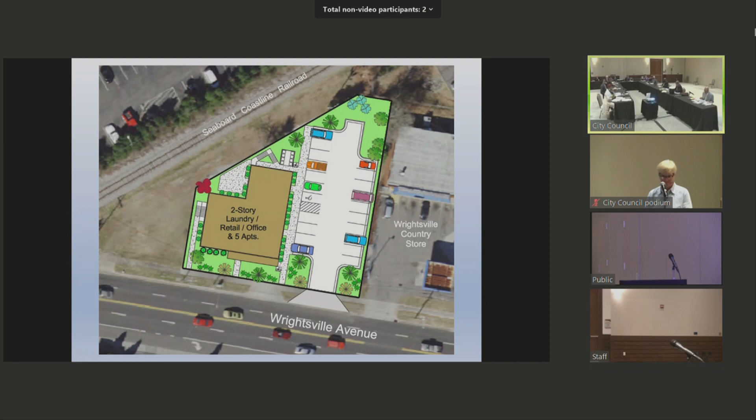At this time, I'm going to open up the public hearing and ask if anyone in the public wishes to speak on either one of these items, PH3B or PH3A.

Okay, thank you. Seeing none, are there any further questions from council? Go ahead, Mrs. Spears. I was just going to ask about the prices as far as the apartment rental. Excuse me?

Apartment rental, the pricing, market value pricing, where we stand at as far as those. I mean, I think it's a great idea, but I just want to ask.

I'm sorry, sir, I didn't understand what you asked. The pricing of the units of the apartments that are residential above. I don't know that it has really been thought out at this point. We have done a conceptual of, could we fit 5 one-bedroom apartments there? Yes. Might they be better if there was 3 two-bedrooms?

Pricing as far as that will be market for this particular community in that area. You've got the trolley station across the way. I think those are not owner occupied, but those are fee simple owned properties. Then you have the apartments across the street. My best guess is they're probably anywhere from 1,000 to 1,200, which seems to be the norm for pricing of apartments. This will be a little bit different because it is a commercial district mixed use type of situation.